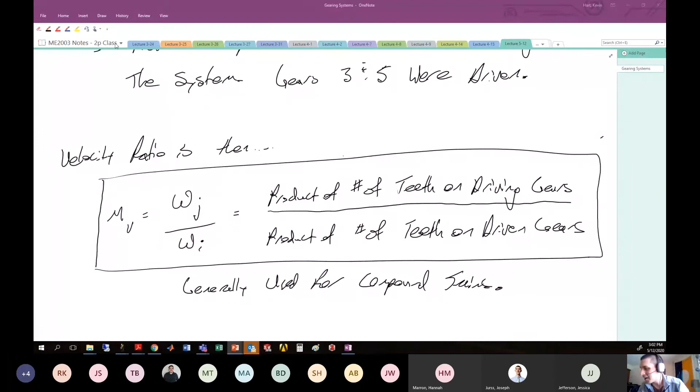Anyways, onward - lecture. A little bit of a slog today. We just got to get through some math and talk about some very basic things relating velocities of gears, but a little bit of a slog today. We'll do some example problems tomorrow that'll help solidify the stuff we talk about today. All right, so here we got lecture for 512, let's dive in.

Remember that we're talking about gearing systems. Our most basic gearing system consists of 2 gears that are pinned at the center. Remember, we had one gear that's driving everything, and we called this the pinion gear, or simply just the pinion. That guy is being driven by some motor, or he's in charge of setting the tone for this whole system.

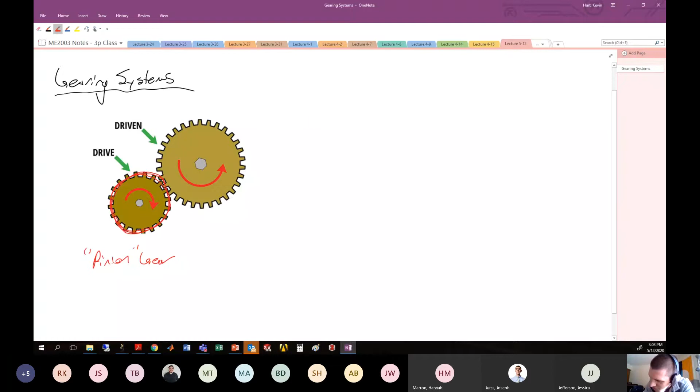We had a little bit of vocabulary associated with these gears, and the major one I want you to take away is that there's this circle that cuts through the middle of all the teeth on this particular gear, but also exists on the driven gear, which we call the pitch circle. This has a diameter, which we call the pitch diameter, which has the variable associated with it, which is little d.

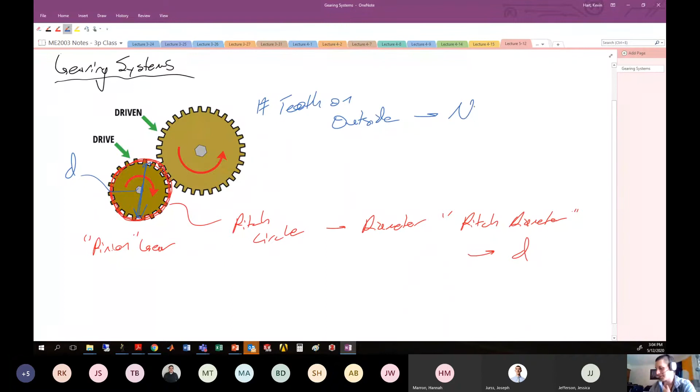Now, this pitch circle has the diameter associated, which is this little d. So I can draw that in here - here's this pitch diameter, little d. And we'll say the number of teeth on the outside we denote with the letter N. You might see it as Ni, where i is the gear in the train you're talking about. So N1 would be the number of teeth for gear number 1, N2 would be the number of teeth on gear number 2, and so on and so forth.

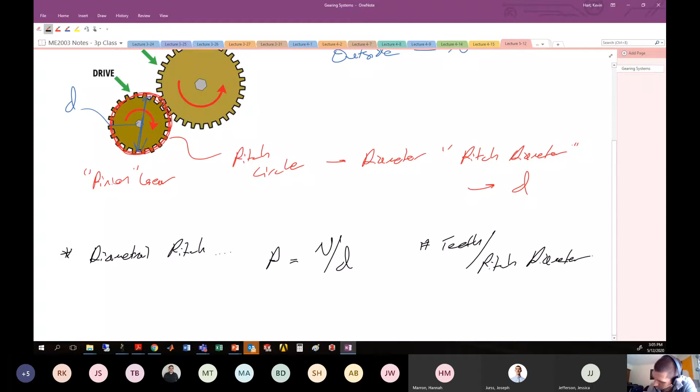Then the big vocabulary word that came from this was the ratio of the number of teeth to the pitch diameter, which we called the diametral pitch. Here we gave that capital P, which is the number of teeth divided by the pitch diameter of that particular object - number of teeth divided by pitch diameter. And we said that if 2 gears are mating with each other or meshing with each other, they must have the same diametral pitch.

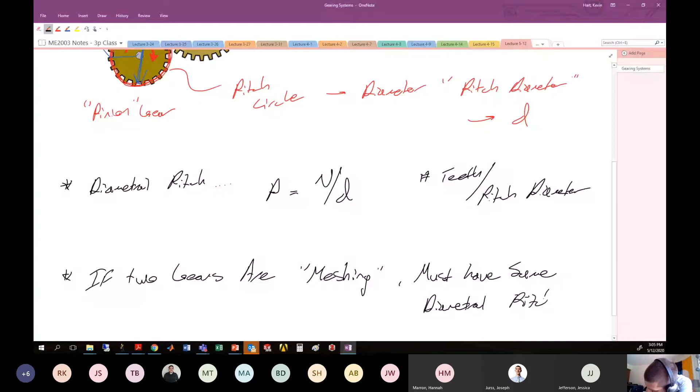Okay, so those are the big takeaways from Friday's lecture. We also discussed some other general vocabulary about gears that's useful for you to have as engineers when you're going into conversations about potentially making a gearing system. When someone says, what's the gear ratio, what's the addendum, what's the pitch point, what's the pitch circle, yada yada, you can actually understand what those things are.

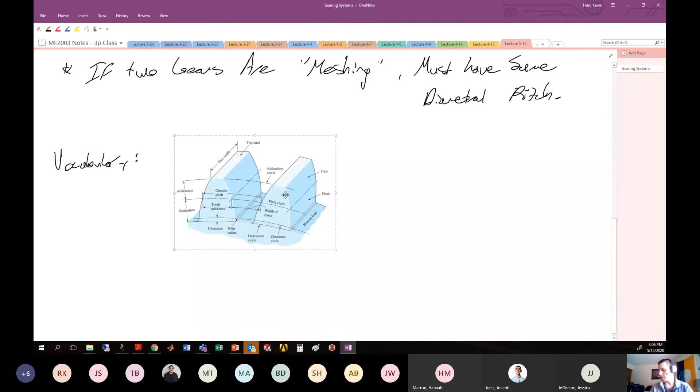So we had some vocabulary that was associated more or less with the teeth of the gear that looked something like this. So our vocabulary in terms of a picture looked something like this.

And so I was just talking about the pitch circle, which is like the circle around the gear upon which all these calculations are based. The diameter of this guy would be the little d that I just talked about. So there's your pitch circle.

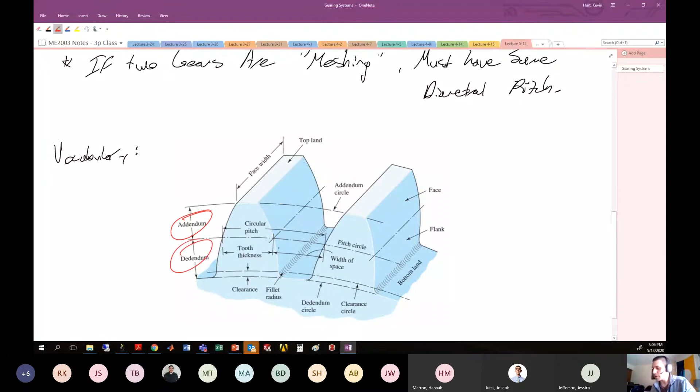We also talked about addendum and dedendum, which is the distance from what is the mesh point to the top or the bottom of the tooth. And we also talked about circular pitch, which is the distance between the same point on two teeth in the series.

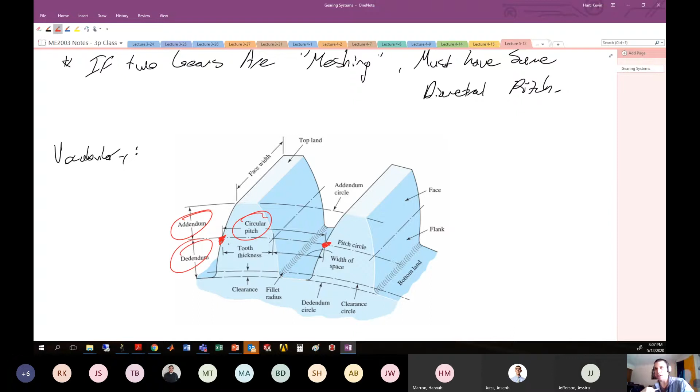So these are just some words you should have in mind at the ready for general conversation about gears. So we did some nomenclature. We talked about a couple of different gearing types: spur gears, pinion gears, bevel gears, worm gears. We talked about all those sorts of things. So that's just a reminder of what we did on Friday.

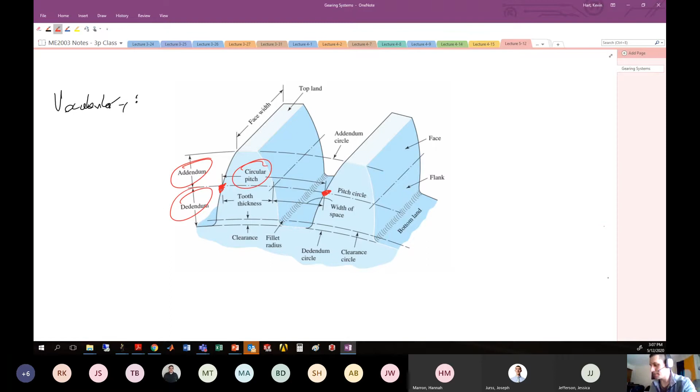What I want to do now is just a little bit more nomenclature, and then we'll get into the math behind how the torques and velocities are transferred between a series of gears. So new material here is just some quick more vocabulary.

And this has to do with two gears that are in contact with each other.

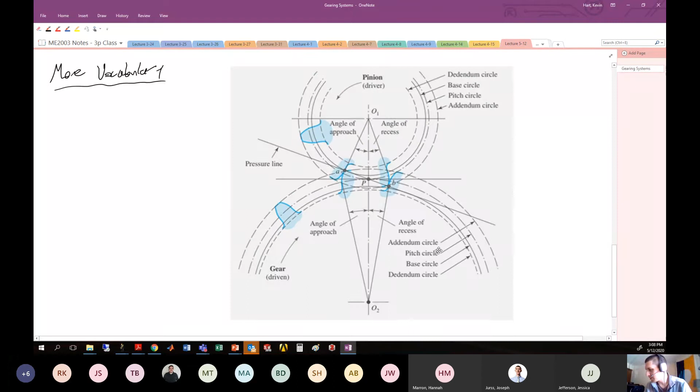You will talk more about an image that looks like this when you get to ME363. But again, we see things we've already talked about, like the pinion gear, the one that's driving the system, and also the driven gear. So that is, his speed and his motion is being dictated by how fast the first one is being pushed.

All right, so things we already know: addendum circle, pitch circle, dedendum circle. These are all things we talked about last time. Pitch circle and addendum circle, you sort of see all of them with this particular image. So this is two gears that are in mate, and we're modeling the gears by these circles that are of interest and importance during the mating process. Here is your meshing point right here.

And you'll see a couple of other words that pop up in this mating image: things like the pressure line, angle of approach, angle of recess, and so on. Those terms are associated with the stresses that form between the teeth of the gears as you're moving them. And that's not something we're going to talk about in this class. So generally, discussions about stress relationships inside gears, all sorts of things, are going to be reserved for your ME363 class after you've gone through 2004 and 3005.

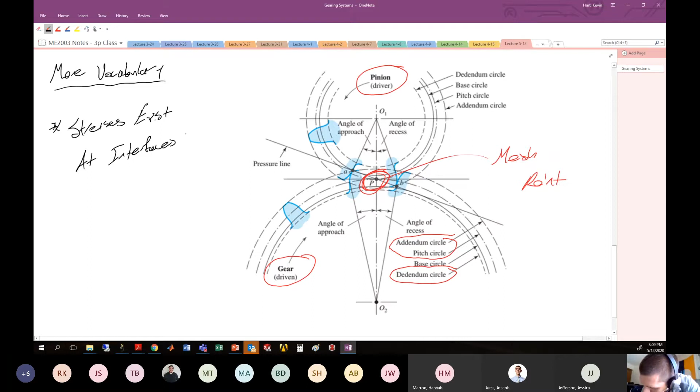Okay, so stresses exist at interfaces of teeth, but that will be discussed in ME363 after you've taken 2004 and 3005.

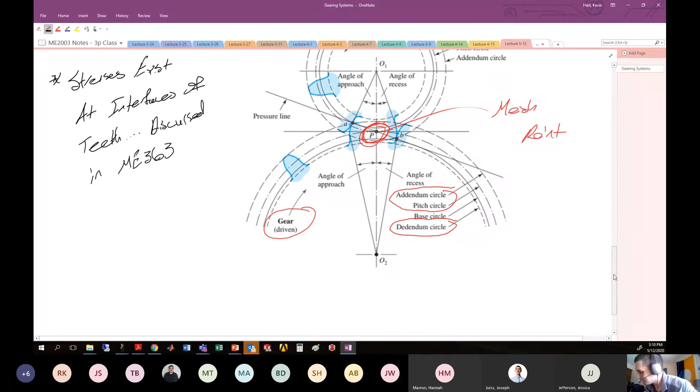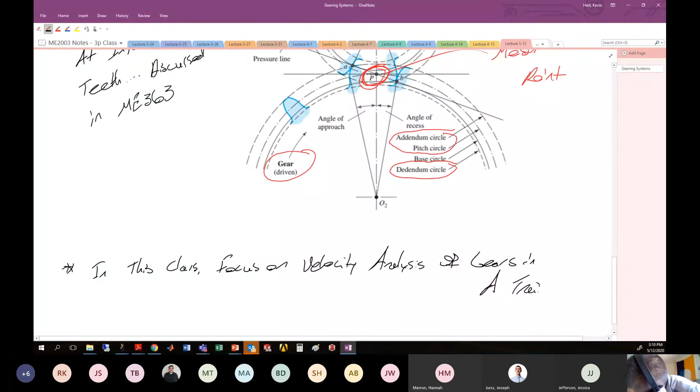Fine. All right, so the point is there's some additional vocabulary you might see with gears in the future, but what we care about in this class is velocity analysis, okay? In this class, we focus on velocity analysis of gears in a train. All right, choo-choo, homies. We're talking about velocity analysis of gears in a train in this class.

Again, this class we care about position, velocity, acceleration. Not even really going to talk about acceleration. We're going to mostly talk about velocity, which is kind of the important bit. So some additional vocabulary, and you will talk more about stresses at the interfaces of various gears when you get to 363, but in this class we care about velocity. So if that's what we care about, let's talk about it. And we'll consider first the most simplistic situation, which is just two gears in a mesh.

So the picture you should have in your mind is here's gear number 1, pinned at the center there, and it's meshing with gear number 2, which is going to look something like this. Not necessarily the same size. In fact, we're going to talk about gears with different sizes to build general relationships.

And they're going to mesh right here at this particular point, and we'll call this point A. So here's gear number 1, and here's gear number 2. Let's say each one of these gears has an associated radius of the pitch circle.

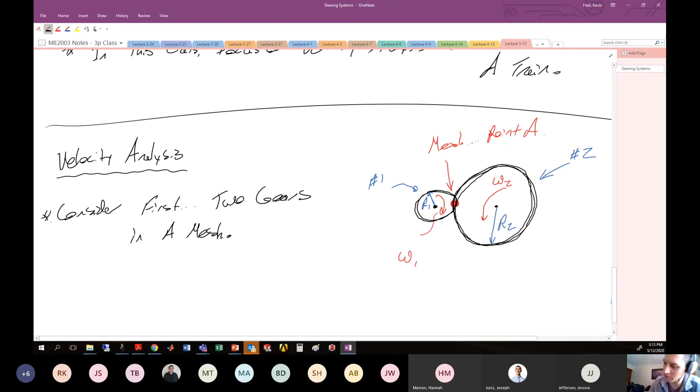Let's say this guy has some angular velocity here, which is omega 1. And to mate properly, this guy is going to have an angular velocity in this direction, which is omega 2. We'll assume that gear number 1 here is the driving gear, so gear 1 is the pinion, meaning that it's forcing the system to go.

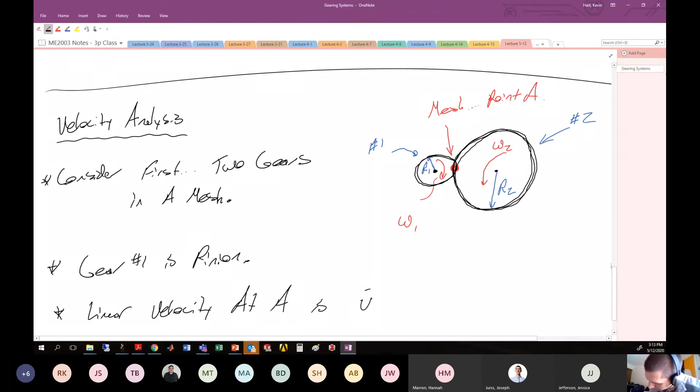So if this is the particular case, we know from our angular velocity and position equations that there is a linear velocity that exists on that particular gear, something like omega cross r. So linear velocity at A is VA equals omega cross r. We know this from months ago, but I told you, it ain't going away.

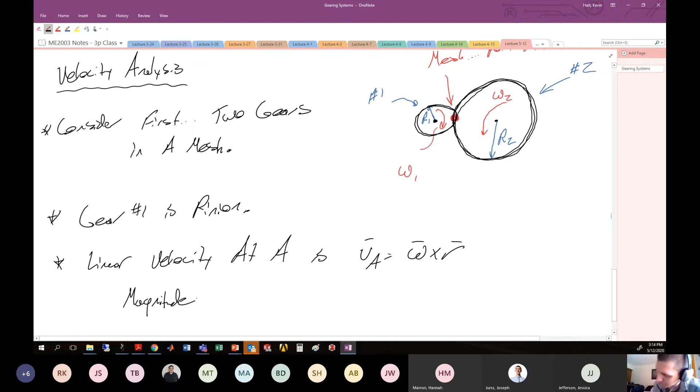Magnitude, since this is pinned at the center, will obviously be: the magnitude of the velocity of A is going to be equal to omega 1 times R1. V is omega R, we saw this countless times in this class. Well, probably 50 times in this class we've seen this. Velocity at point A is omega 1 times R1.

Also, we know that these two rigid bodies are in contact with each other. And if they're in contact without slip, which is what we're assuming, then the velocity at the point of contact of these two rigid bodies must be the same. So VA is shared between gears 1 and 2. Therefore, we also have the magnitude of VA is also omega 2 times R2, since it's shared at this particular meshing point where they're touching each other.

So therefore, the relationship emerges here, which is R1 omega 1 equals R2 omega 2. The radius of the first times the angular velocity of the first is the radius of the second times the angular velocity of the second. That is a useful relationship to know, and it all comes from the idea that they're not slipping against each other, so the velocity is the same at the point wherever they're touching each other.

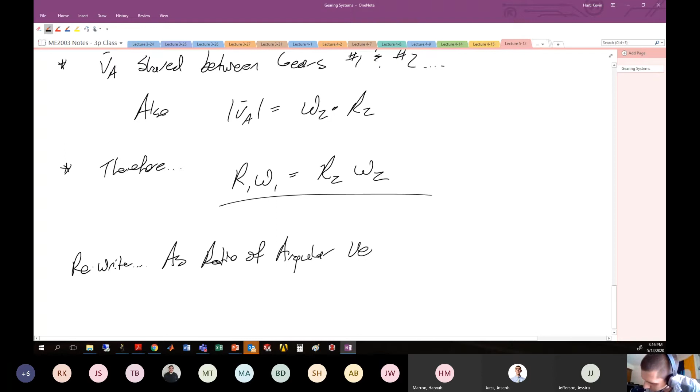Okay, so we can rewrite. Usually when you're talking about gears, you're talking about the ratio of the velocity of the gears. So if you ever hear something like the gear ratio, you're talking about what is the angular velocity of the output gear given some information about the input gear. So we're going to rewrite as a ratio of angular velocities.

That's going to be omega 2, the output angular velocity, normalized by the input angular velocity. This velocity ratio is equal to R1 over R2. Or if we're talking about pitch diameters, you could have D1 over D2. This ratio of the output angular velocity to the input angular velocity is known as the velocity ratio, so we give that the symbol MV. Here's the first takeaway equation from this portion of the class, the ratios of the angular velocities of the gears given their various radii.

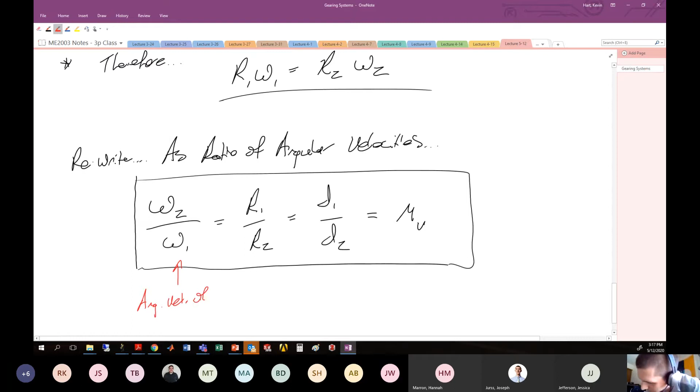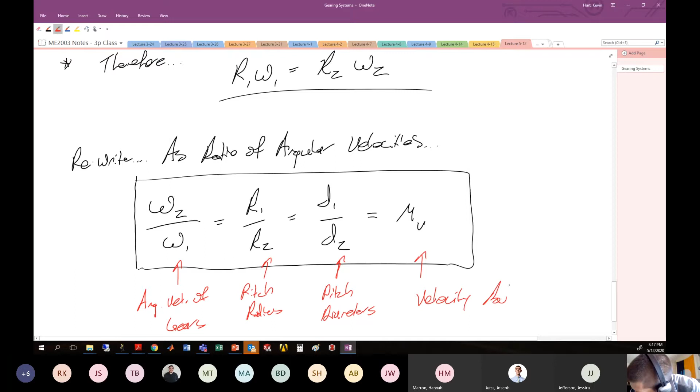So here is angular velocities of gears, here's the pitch radius, this is the pitch diameter, and here is the velocity ratio. This is going to be the first and most basic relationship that we have between two gears that are in mesh with each other: this velocity ratio of output angular velocity to input angular velocity is a ratio of the radii of the two individual gears.

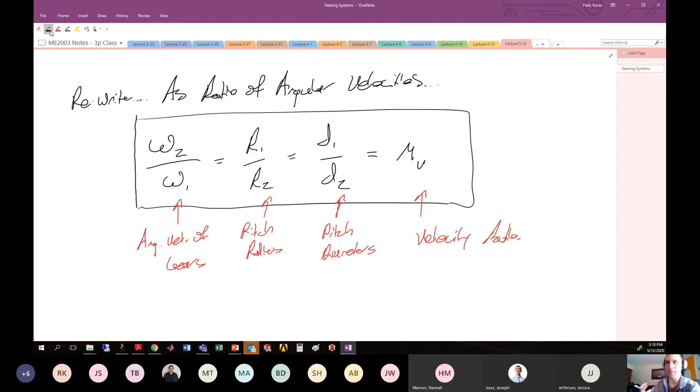One last thing that we'll say is that we can bring in number of teeth into this by introducing diametral pitch. Let's recall.

Diametral pitch is equal to the number of teeth on that gear divided by the pitch diameter. Rearranged, the diameter is the number of teeth divided by the diametral pitch.

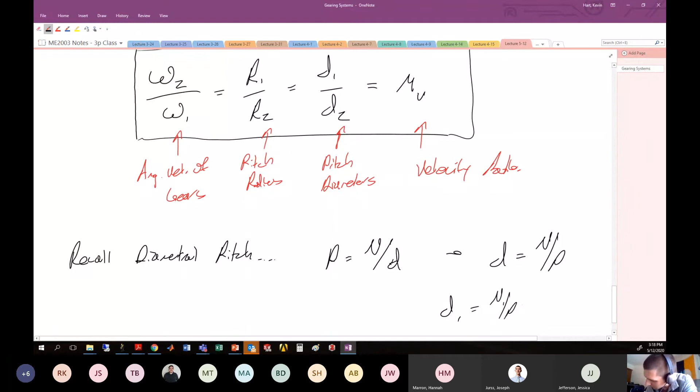So if we want something like D1 equals N1 over P and D2 equals N2 over P, we know that if they're in contact with each other, the P must be the same.

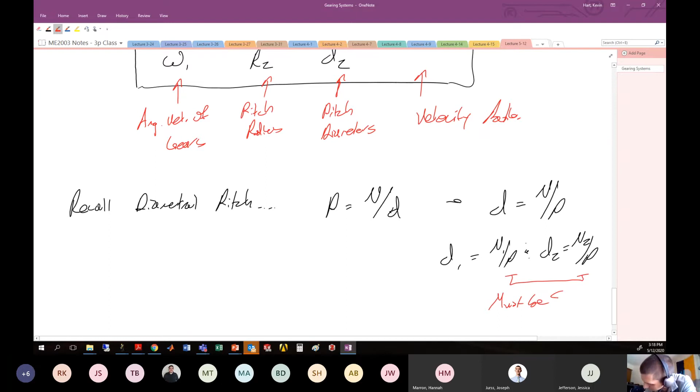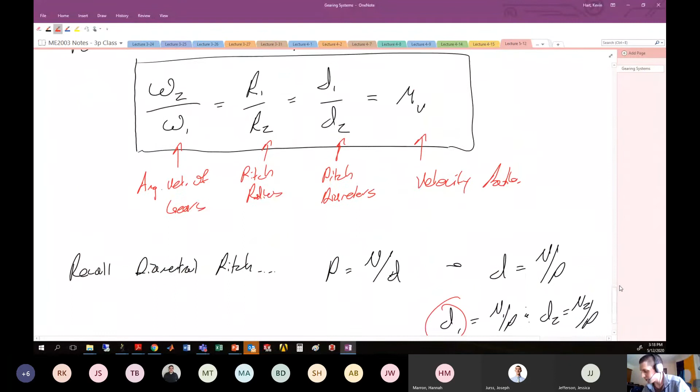So we can plug D1 into here and plug D2 into here, and we can come up with this expression, not in terms of the pitch diameters or pitch radii, which may be difficult to measure directly, but in terms of the number of teeth, which is not difficult to measure directly.

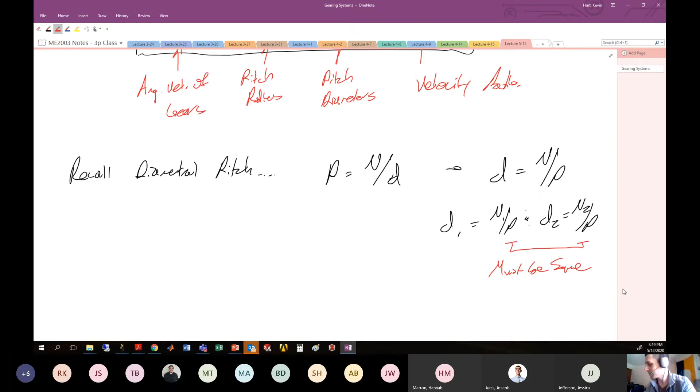So in terms of number of teeth on gears, we have the following: the velocity ratio here is the output angular velocity omega 2 divided by the input angular velocity omega 1, which equals the diameter of the first divided by the diameter of the second, which in terms of number of teeth is a direct relationship, N1 over N2.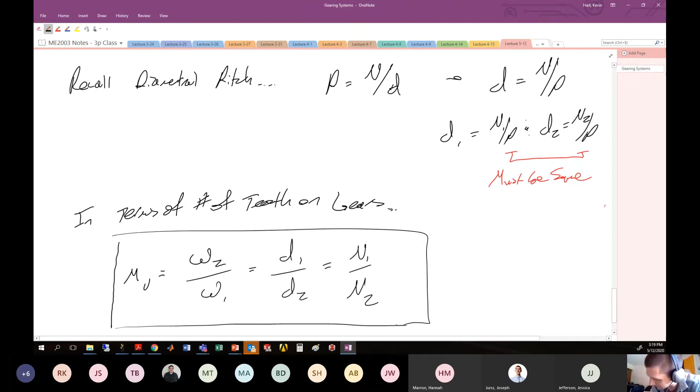So here you go. This is sort of your big takeaway: the velocity ratio relating output angular velocity to input angular velocity and the number of teeth on each particular gear.

How are we doing out there? We all awake? If not, wake up, time for you to put on a little makeup. That song might be a little too old for you guys. Chop Suey, what year did that come out? Like 2000? Maybe earlier, late 90s. You guys may have not even been born when that song came out. Wake up, time for you to put on a little makeup, something, something, shake up. All right, go look that up. I don't even know, Chop Suey, when did that come out? Long time ago.

Back to reality, this equation here is the basis for what is called the fundamental law of gearing.

The fundamental law of gearing has two parts. We only really care about part number one because that's all that's really important to us. It tells us about the ratio of the velocities inside of a gear train, which is what we care about, velocity analysis. There's also a second part to the fundamental law of gearing, which has to do with stress analysis and pressure lines, which is not as important for us.

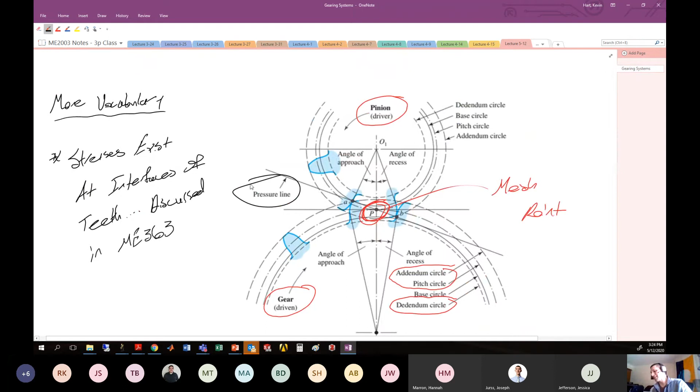About this: if you open up any mechanical engineering handbook and go to the fundamental law of gearing, you will see two tenets. We are not going to talk about number two, you'll cover that in ME363. It relates to this picture, where the pressure line is normal to the point of contact and passes through the pitch point. That has to do with stress calculations, but we don't do stress calculations in this class, so we don't care about that.

All right. Back off. Damn.

All we care about is number one. Remember, number one is digging into the equation we wrote up here, which is this: the velocity ratio between any two gears in the system is constant, some constant value. So let's expand on that idea and talk about bringing more gears into our system by looking at gear train analysis.

We've talked about the most simplistic gear train, between two gears. Now what happens if we bring more gears into the train? We start to create what are known as simple gear trains. Let's look at those.

Choo-choo. It's time for a simple gear train. Yeah, choo-choo. Here we go. Simple gear train. Bam.

All right, there's your simple gear train. Here is the gear number. In this particular train, we have 5 gears, labeled numbers 2 through 6. By convention, the first gear in a train is usually labeled gear number 2, because the motor inside the engine that drives gear number 2 is gear number 1. So usually in a gear train you'll see that first gear as gear number 2. On the right-hand side you see all these things, which are the number of teeth on each particular gear. So N2 is the number of teeth on gear number 2, N3 is the number of teeth on gear number 3, and so on. That's the basis for this figure.

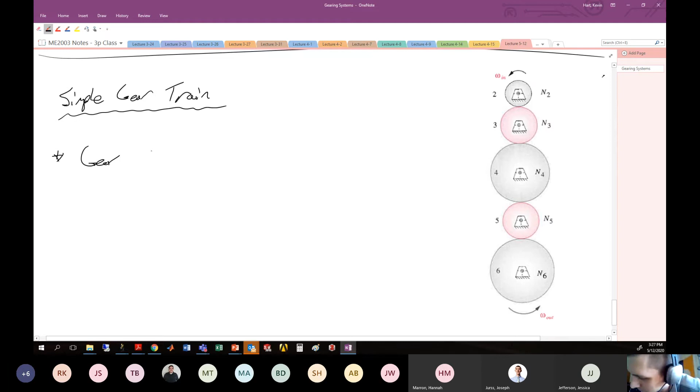So let's get rid of all this nonsense and write some stuff down on the page. Gear trains are collections of 2 or more gears in mesh. We've talked about that already. Choo-choo, away we go on our gear trains.

A simple gear train is one where every shaft has only 1 gear attached to it. In this particular example, there's a shaft here upon which this gear spins, 1 shaft here upon which this gear spins, 1 shaft here, 1 shaft here, 1 shaft here about which this gear spins. That is not the way that your car transmission works, okay?

Your car transmission has multiple gears on the same shaft, and when you switch gears, you switch which gears are in mesh with each other. That's how your car transmission works, all right? Your car transmission is not a simple gear train, it's a very complicated gear train, called a compound gear train. We'll talk about those in just a second. This is a very simple train, 1 shaft per gear, and it's a good basis for our analysis, even though systems like this are hardly ever seen in practice.

We know from the fundamental law of gearing, the velocity ratio must be constant. So the velocity ratio, which tells us what the angular velocity is at the output given the input, something like omega 6 over omega 2, is going to be a constant, which is the combination of the products of the individual meshes along the way.

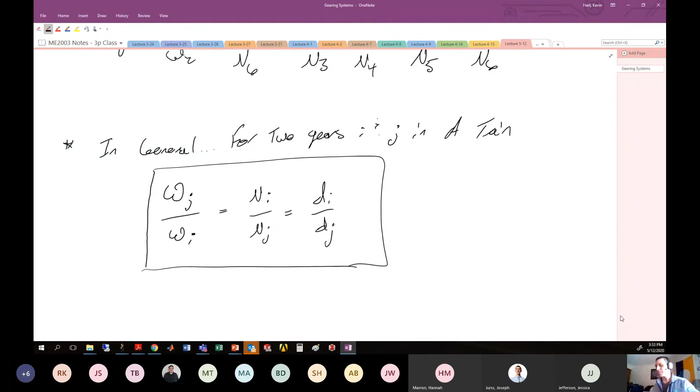There's a slight mistake here in the notes, and I'm going to correct it on the fly. We know that if we go to this train and look at the direction of the input angular velocity and compare it to the direction of the output angular velocity, if we have an odd number of gears in our train, they will be the same direction. If we have an even number of gears in our train, they will be in opposite directions. So to distill that down, if j minus I is an even number, then angular velocities will be in the same direction.

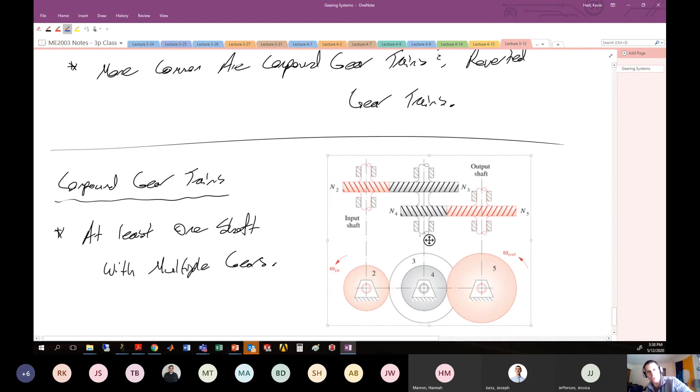So here we see multiple gears. We're looking at this from above. Multiple gears on the same shaft. All right, so this is a compound gear train. There's some kind of funky things that happen here in the analysis, but we'll power through those as we see them.

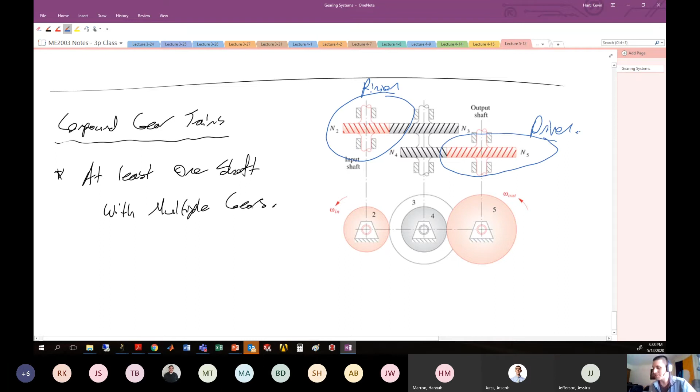Here's your input shaft. This is like your pinion for the system. And here's your output shaft when this guy is being driven, more or less. What I want to know is, if I know all the teeth on each one of the gears, and I know what the input angular velocity is, what is the output angular velocity? That's all we care about in this class. Velocities, right?

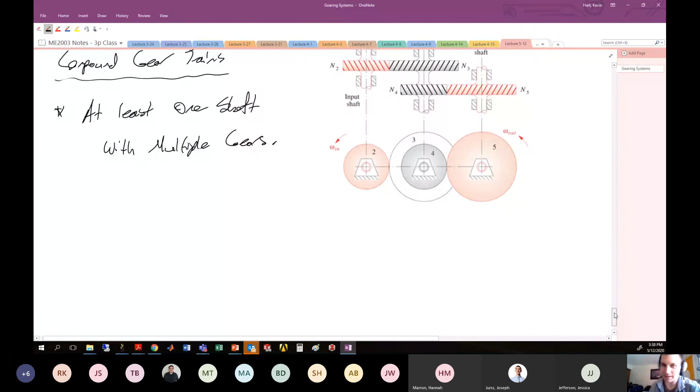So at least one shaft with multiple gears. Let's step through our analysis of this particular guy. Obviously, the gears that are on the same shaft will have the same angular velocity. We just know this for rigid bodies.

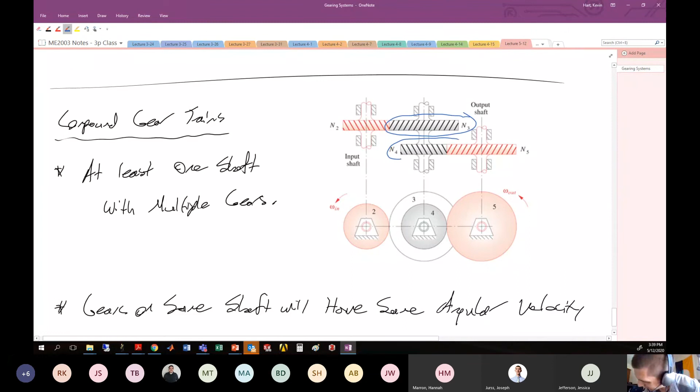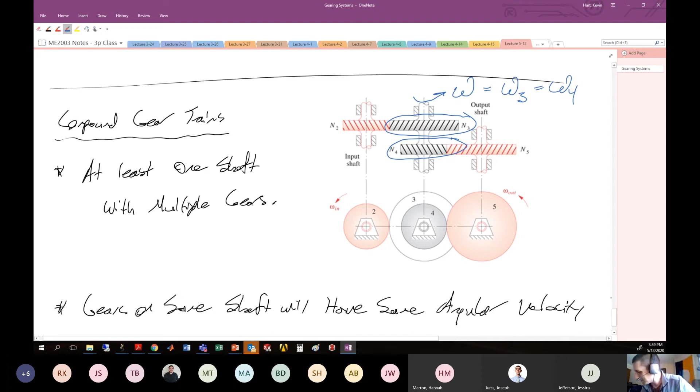What I mean by that is because this gear and this gear are rigidly attached to the same shaft, whatever angular velocity this guy has is going to be the angular velocity of gear number 3, which is going to be the angular velocity of gear number 4. They're all rigidly attached, they all have the same angular velocity. This goes back to week number 2. So gears on the same shaft will have the same angular velocity.

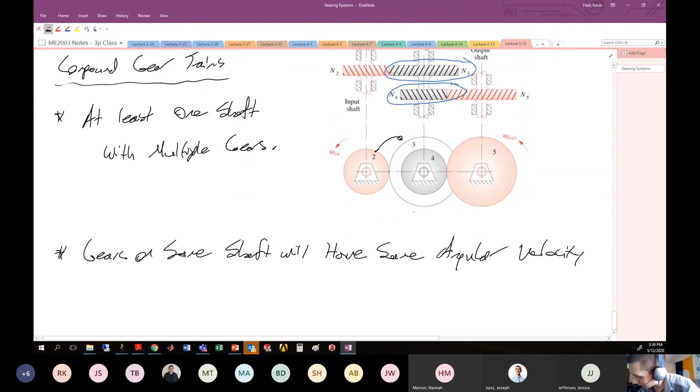So let's step through what the velocity is of 2 relative to 3, then 3 relative to 4, then 4 relative to 5. We'll just step through our analysis so that we can figure out what the output angular velocity omega is given the input angular velocity. So if we have omega 2 and n2 through n5, what is omega 5?

What is omega 5? Well, let's look at this. From 2 to 3, we have our very simple relationship. It's just a simple mesh here between 2 and 3. And so we have the relationship that the output omega 3 over the input omega 2 is the ratio of the teeth on these two guys, N2 to N3. This is what we talked about at the beginning of lecture.

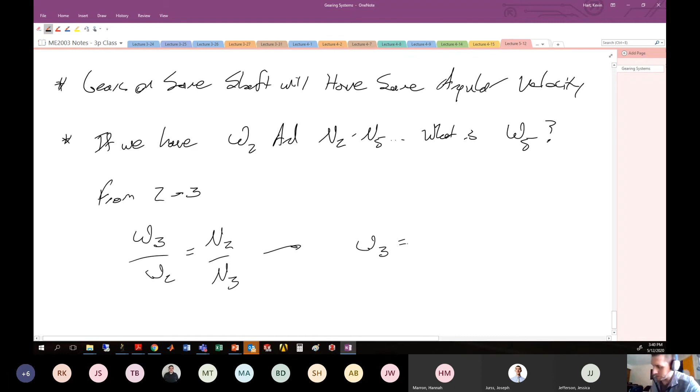So we could write here that the angular velocity of gear number 3 in this train is the ratio of the teeth of the two times the input angular velocity omega 2. All right, so we'll keep this guy and come back to that. That is your angular velocity of the second gear in this train.

From 3 to 4, we just said that since they're on the same shaft, omega 3 and omega 4 are the same. So we could continue and write directly, omega 4 is still the same relationship, which is the number of teeth on the second divided by the number of teeth on the third, multiplied by the angular velocity omega 2. We'll label this double star.

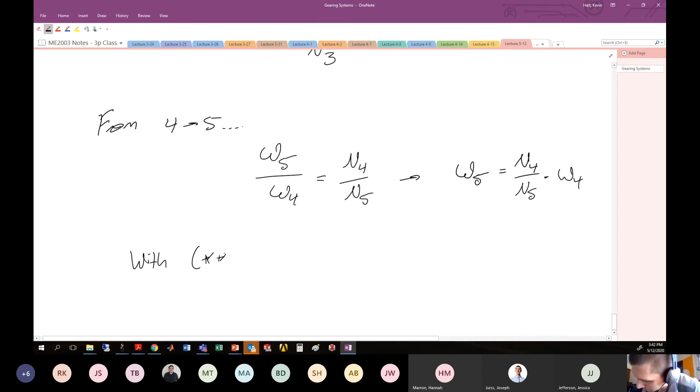Finally, if we analyze what's going on between 4 and 5, again we'll use the same relationship we have up here: omega j over omega i is ni over nj. We have that omega 5 over omega 4 is n4 over n5, or that omega 5 is this ratio n4 over n5 times omega 4. And we'll plug in this double star, and you'll get that omega 5 here is n4 over n5 times n2 over n3 times omega 2.

All right, so this is your final output angular velocity given the input angular velocity. Now, the reason why I write this out fully and why we go through the analysis of this kind of simple compound gear train is because we see a pattern emerging here. What is the pattern? Like I said before,

gear number 2 here is the pinion. This guy drives number 3. So here is number 3. Number 3 is being driven. Maybe I'll do that in red so that we can distinguish.

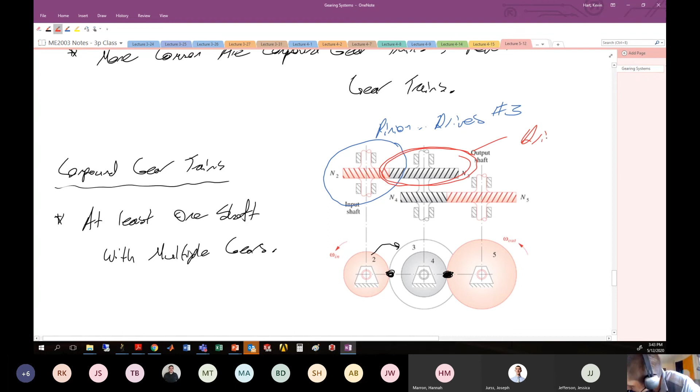A very similar idea would exist for gears number 4 and 5 if we assumed that 2 and 3 were not there. Imagine putting your hand over numbers 2 and 3, pretend they're just not there for a second. If that were the case, then 4 would be like the pinion. So I'm going to call this a pseudo pinion, because it is driving number 5.

So here the idea is 2 is driving 3, and if we just got rid of 2 and 3, then 4 would be driving 5. So we have this idea and concept of driving versus driven gears in this compound system.

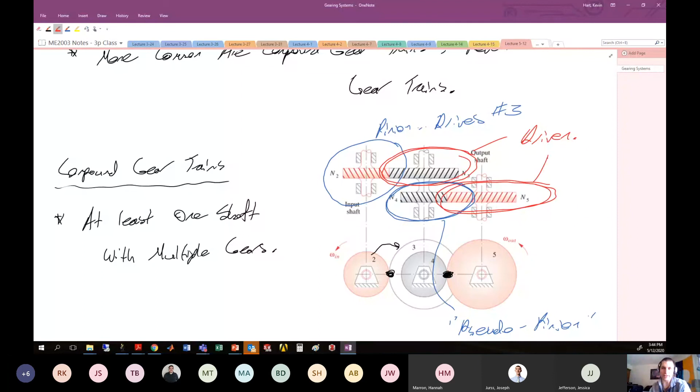What you'll notice is that in the numerator here, we have numbers 2 and 4, which are related to pinions, or the driving gears. And on the denominator, we have 5 and 3, which are the driven gears.

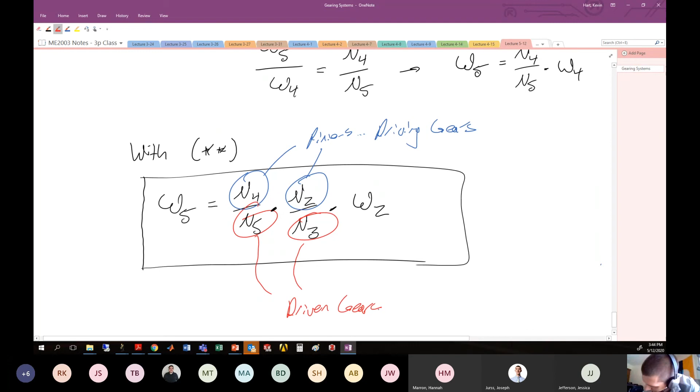So we rearrange here, and we could write omega 5 over omega 2, if we just took omega 2 to the left-hand side. Remember, this is my velocity ratio of my system, 5 on 2. Here this is something like N4 times N2 over N3 times N5, where both of these guys are driven, and both of these guys are driving, or pinions.

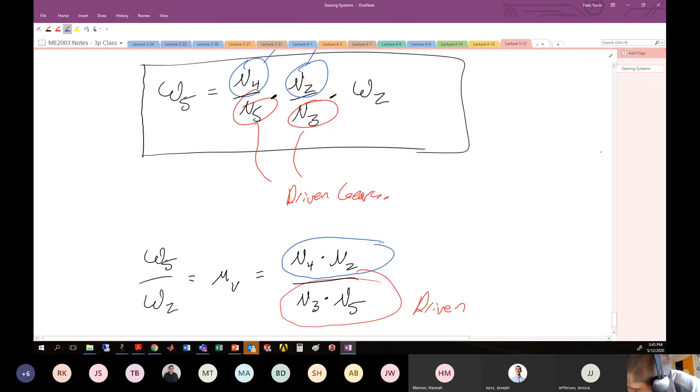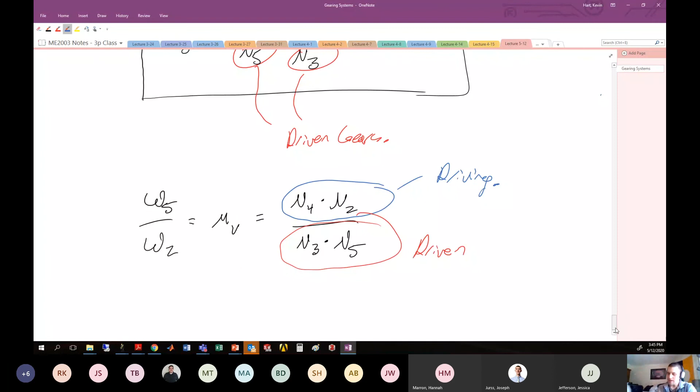So we can see this pattern emerging if you have a compound gear train. What we saw before is a two-stage compound gear train, where this here is stage number 1, and this here is stage number 2. So we have a two-stage compound gear train. The general idea holds.

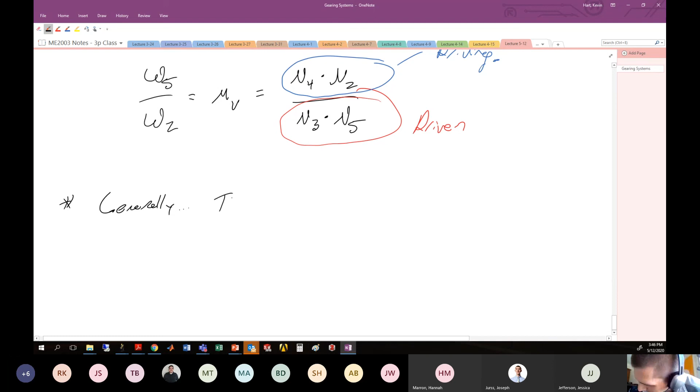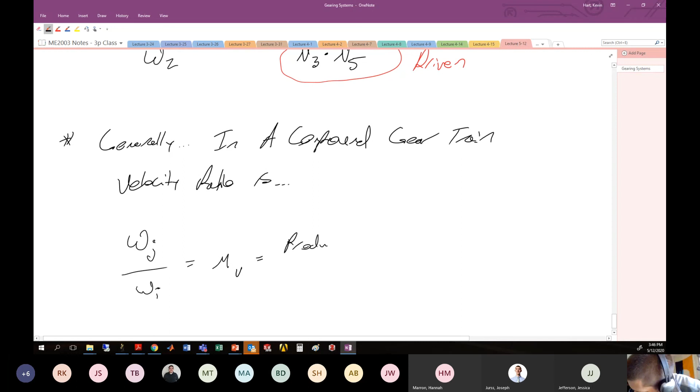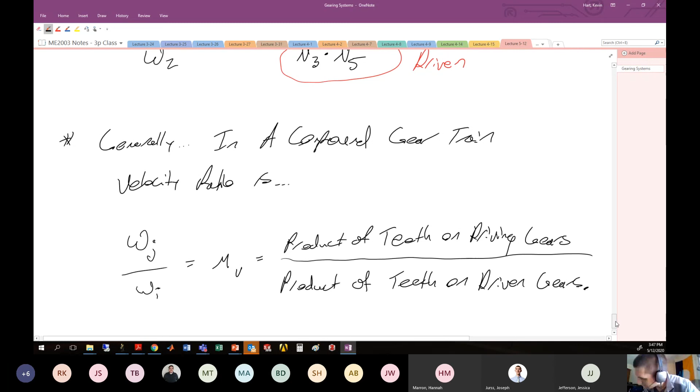So we would generally say, in a compound gear train, that the velocity ratio, omega j on omega I, is going to be equal to this velocity ratio mv, which is the product of teeth on driving gears divided by the product of teeth on driven gears. So there's your general relationship for a compound gear train.

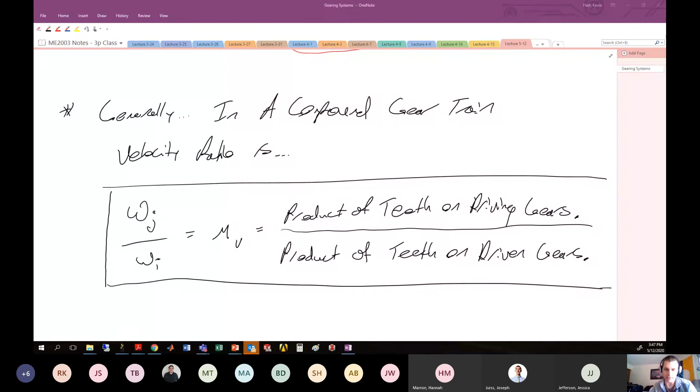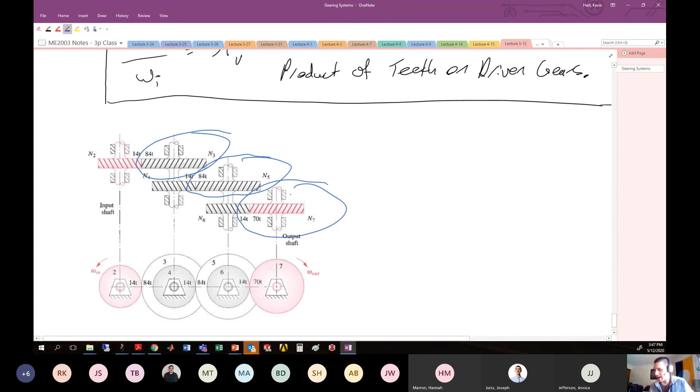The same idea would still hold: you have driving gear, driving gear, driving gear, all driving the driven gear, the driven gear, the driven gear. So you're going to have something like omega out over omega in equal to the product of the teeth on the driving gears, 2, 4, and 6, over the product of teeth of the driven gears, 3, 5, and 7. Same general principle holds in this configuration. You can add more and more stages in your compound gear train and just have the same general relationship: driving, driving, driving, driven, driven, driven, and so on.

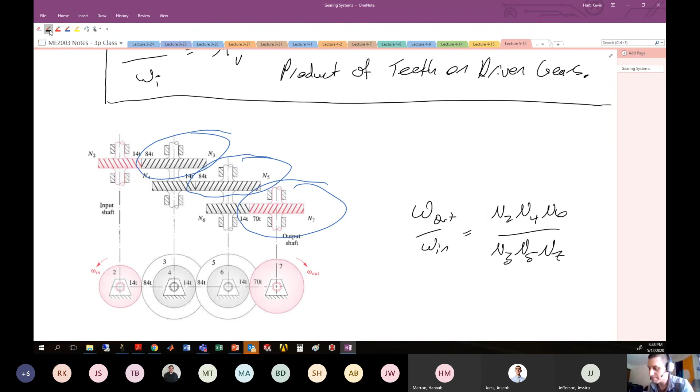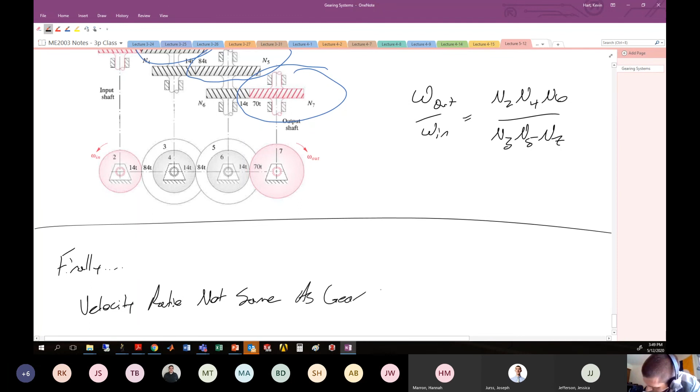Last comment I want to make is in relationship to the gear ratio. Most of the time when we're talking about gearing systems, you'll hear the gear ratio, not the velocity ratio. They are not the same. The velocity ratio and the gear ratio are not the same thing. They are inverses.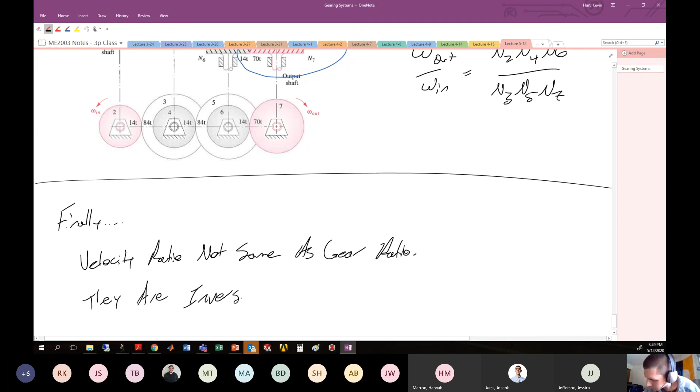What I mean by that is that the velocity ratio, mv, which is usually the output over the input, is the inverse of the gear ratio. Or the gear ratio is the ratio of the input divided by the output.

Almost exclusively, when people are talking about gearing systems, they're talking about a gear ratio. And personally, thinking about a gear ratio is easier than thinking about a velocity ratio, because I want to think about the ratio of what I put in versus what I put out. So if I have a gear ratio of 80 to 1, that means I put in 80 RPM and get out 1 RPM. If I have a gear ratio of 1 to 80, I put in 1 RPM and get out 80 RPM.

So usually when you see data sheets about the gear ratio of the gears inside some black box you just bought, and you see something like 3,600 to 1, that means you're putting in 3,600 RPM and getting out 1 RPM. So usually you'll see things in terms of the gear ratio, not the velocity ratio. It's very important to keep these two different things straight, because the ratio of in to out or out to in is different for gear ratio and velocity ratio.